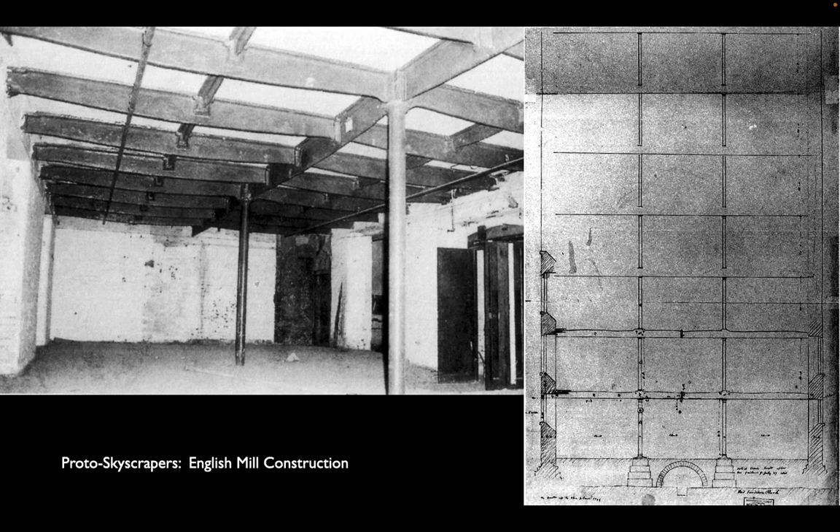In other words, illumination was as important as structure. If you couldn't bring daylight into a space, you couldn't rent it. Now, we've looked at mill construction, British mill construction, and essentially what we're going to find is that the skyscraper is a kind of variant of British mill construction, but with a couple of changes. One is that the heavy masonry jacket around the outside begins to lighten up, begins to open up so that more and more daylight can come in.

The other is a series of changes in the materiality that goes from cast and wrought iron to steel, and those two things are related. Steel offers structural benefits that replace basically what the masonry jackets around these mill buildings had done. So in one sense, these British mills are proto-skyscrapers, right? 5 to 7 stories of mostly iron construction, but with brick exterior walls that take a lot of the gravity load and also provide all of the building's stiffness.

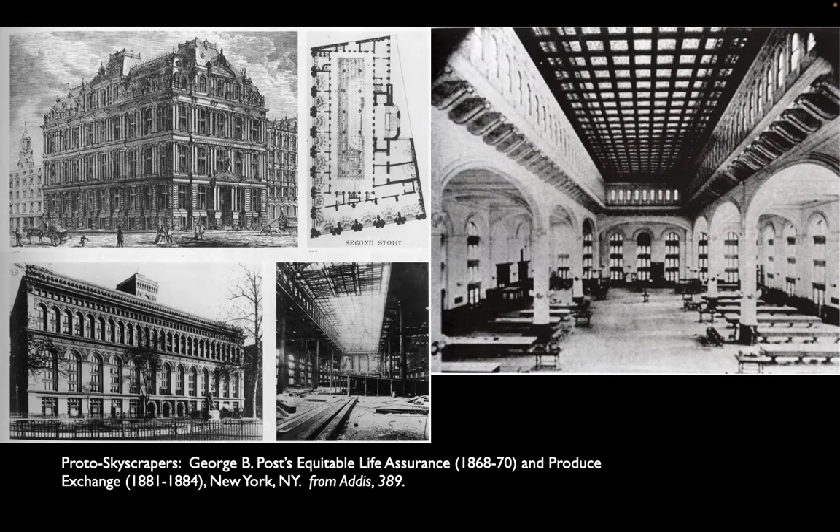There are a number of buildings throughout the 1860s and even into the 1880s that we might also call proto-skyscrapers, a number of them in New York, which are basically masonry skyscrapers that are assisted by iron. George B. Post, well-known New York architect, does these two buildings, the Equitable Life Assurance in the upper left, which, as you can see, has an atrium that is supported by cast iron columns in the plan, and the one on the bottom and in the image on the right, which is the Produce Exchange.

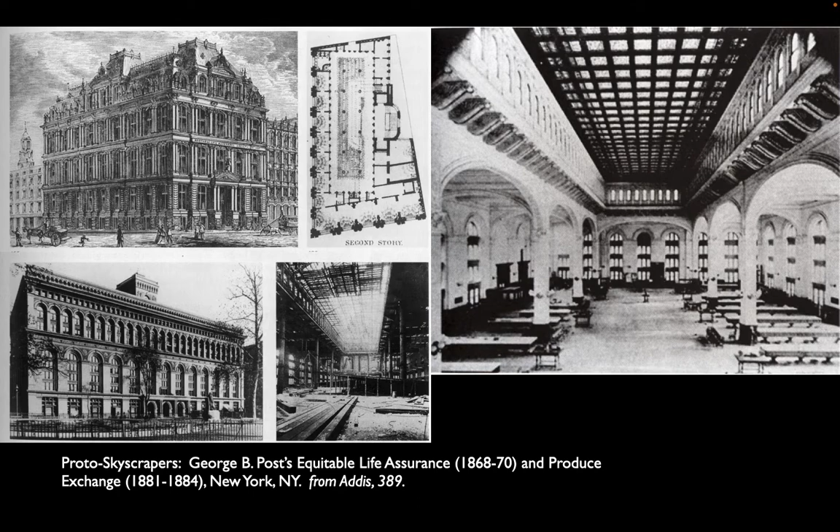And this building uses iron extensively, as you can see in the construction photo, but again also relies on masonry walls for most of its lateral stability. Not only are those masonry walls carrying the load of the floors at the building exterior, but they're also providing the stiffness against wind. Now, a lot of these changes happen in Chicago, and it's important to talk about why Chicago is different from New York. There are a couple of reasons.

One, the geography of the city is such that real estate speculation there gets to be much more intense. The booms and busts in Chicago are much greater, and that has to do with the geography of the city. When the city is founded, there are Native American trading routes that take advantage of the fact that the end of the Chicago River is just a short portage from the Des Plaines River. And when you bridge that divide, you go from the Great Lakes, and thus the St. Lawrence River, and thus the Atlantic, to the Des Plaines, and then the Illinois, and then the Mississippi, and then the Gulf of Mexico. So Chicago, even before it's a city, sits at the intersection of these two great trade routes.

As European settlement takes place, they realize the benefits of the city could be even more enormous if there's a direct connection. That portage is eliminated by a canal in 1848. That means now that river boats can bring goods from the entire Mississippi Basin up the Chicago River to the city. Those goods have to then be taken off and put on boats that can handle the rougher weather of the lake. So right away there is an exchange between goods that are brought by river and goods that are shipped by lake.

The two don't connect, and so just like the river boats and the lake boats, grain has to be taken off of one set of trains and put onto another. So Chicago, again, is a place where goods are exchanged. They're taken off of one set of transportation and put onto another. Chicago, therefore, becomes one of the great rail centers of the country, becomes the center of engineering expertise.

So iron foundries in Chicago make the wrought iron that is used for railroad bridges throughout the West. Prefabricated bridges can be loaded onto a train, taken out to the end of the line where the rail has met a kind of impassable river. The kit of parts bridge can be assembled by a crew of lightly skilled workers, and the railroad can continue to move west. A lot of that expertise, a lot of that industrial production ends up in Chicago. So there's a native iron industry that grows up there.

And as you can see, this is a map from about 1890. What we today call downtown Chicago is literally surrounded by both a harbor and a set of rail yards that are all about taking the grain from these farms and putting it onto boats or putting it onto other rails, and at the same time shipping things to manufacture the rest of the railroad network west.

When you look at the river, you see that it is dotted with grain elevators, with lumber yards, and with warehouses. And it's only really the center city, what today we call the loop inside the elevated railroad, that is a commercial center. The rest of the city, the riverfront, all of the lakefront, is taken up with railroads and warehouses and grain elevators. Again, a great deal of construction expertise goes into some of these buildings.

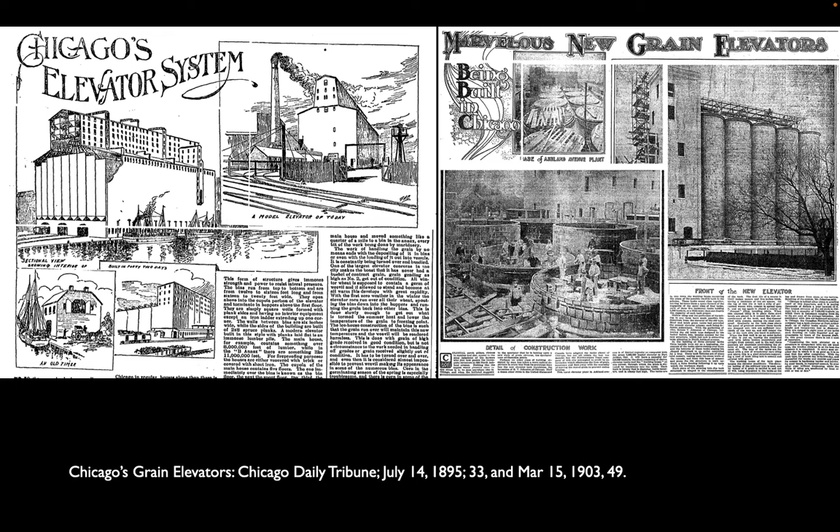Grain elevators are kind of rethought, reinvented in Chicago. The first concrete grain elevators are built in the Chicago region at the end of the century. Here you can see a couple of the largest ones. These are the Illinois Central grain elevators. They stood about where Vista Tower stands now on the riverfront.

And on the bottom you can see that the rest of the riverfront is just taken up with warehouses and lumber yards. So this is all material that is either going to be shipped west to make houses throughout the Midwest, or east, grain that's going to the markets of Boston, New York, and Philadelphia. Now, interestingly, the other major construction that happens in Chicago are offices.

All of this exchange means that there is money to be made, that speculators can come in and they can buy what are called futures contracts. They can promise farmers out in Iowa and Minnesota and Nebraska a certain price for grain that's going to come in a few months. If they think that the eastern markets are going to pay more, then the speculator pockets the difference. And this kind of gambling is the basis of today's commodities exchange.

And it grows up in Chicago because there is so much material, there's so much grain that is sitting in these elevators waiting for shipment out east. It allows speculators to come in and bet on the material without actually having to own it or to house it themselves. Because this is a very sort of personal set of transactions, you have to bet with other speculators. You need access to bankers, you need access to lawyers, you need access to telegraph machines.

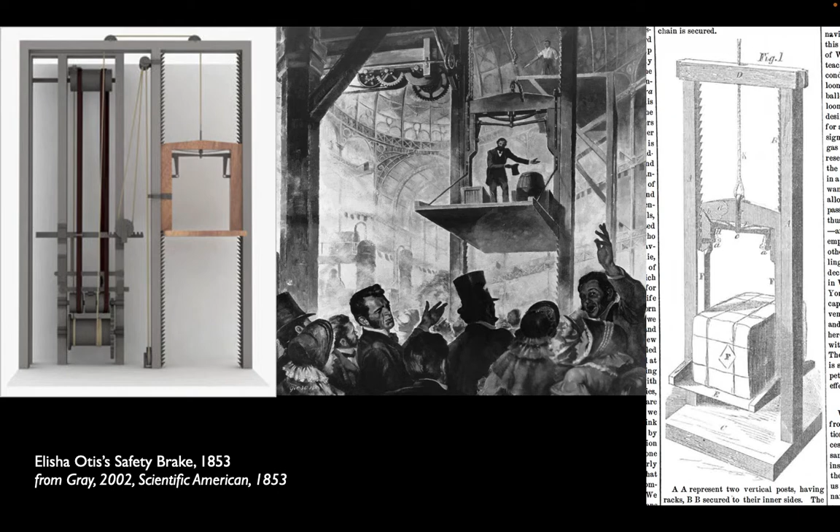Now, that is part of the story, right? That would allow you to go up higher beyond 5 or 7 stories if the structural technology were there too. The structural technology by then exists. We've looked at cast iron fronts, we've looked at cast iron structure. We've seen that the compressive strength of cast iron should allow you to go as tall as you want. And cast iron has the additional advantage of being much more efficient than brick.

If you remember when we went back a couple of weeks ago, we looked at the difference between sun-dried and kiln-fired brick and noticed that there was about double the strength that you get with fired brick over mud brick by putting it into a kiln and evacuating all the water through heat.

Pressed brick uses hydraulic pressure to squeeze the water out of the wet clay before firing. And as you can see, the result of pressing and then firing means that pressed brick is roughly double the strength of fired brick, right, which is double the strength of mud brick. Also, like the difference between fired and mud brick, it's hardier, it's less susceptible to weathering.

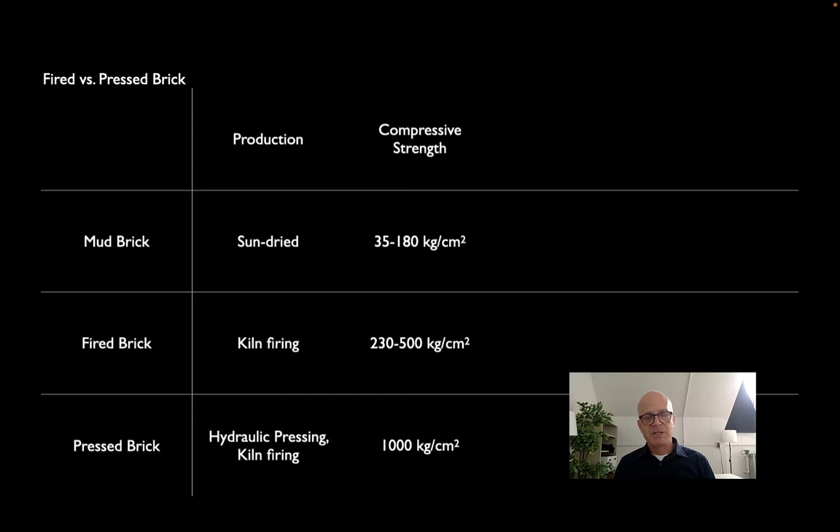So Chicago imports these machines. Brickyards use the clay from around the Chicago River, and the city develops its own brick industry that is quite successful, as you can imagine, because everyone who builds in Chicago is worried about the effects of the fire on iron and on timber.

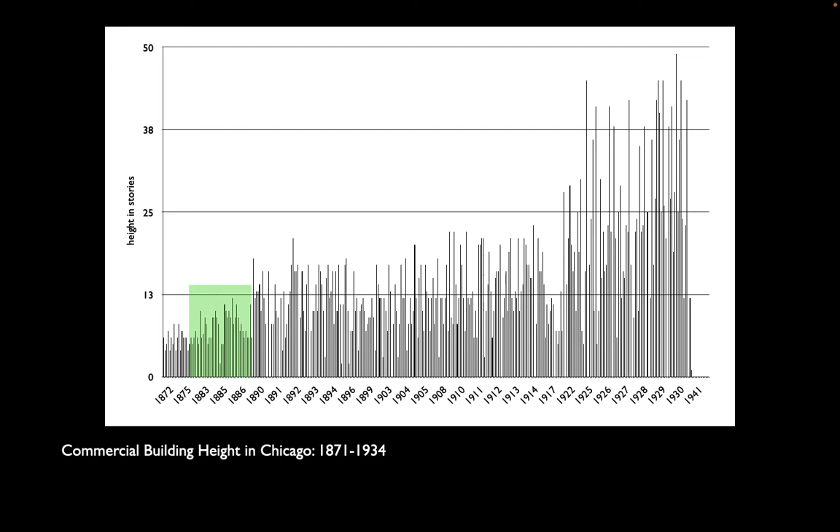We see the effects of fired brick come in the very, very early years after the fire. This is a chart showing the height of every major building built in downtown Chicago in these 60 or so years. And after the fire in 1871, you see the building sort of goes on for a little bit and then jumps. And this is an indication that architects and builders are beginning to take advantage of this new technology, right, or this improvement on an old technology.

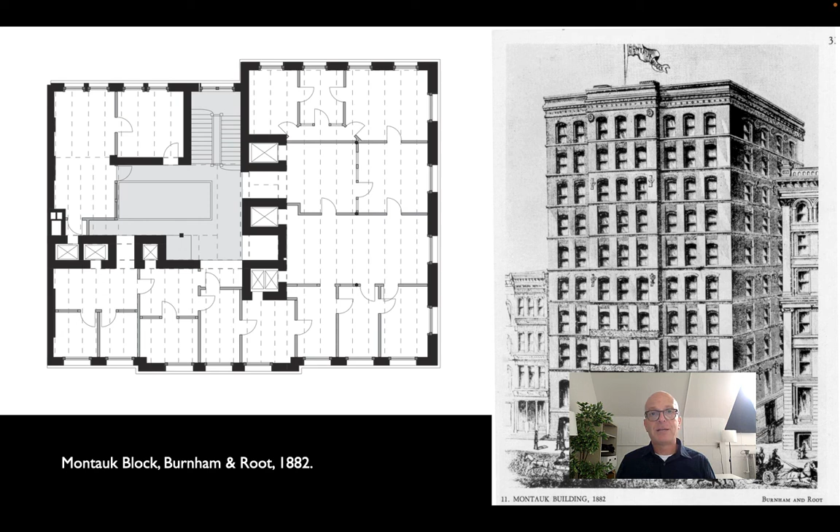In the next portion of the lecture, we'll talk about the other major development that the Montauk presented, and this has to do with the same clay that brickmakers are using to make the material of the Montauk. It has to do with what happens when you put a heavy brick structure onto that clay and try to support it. The Montauk solution would become one that was uniquely Chicago's, and that would contribute to a very, very particular way of thinking about skyscraper construction in that city.